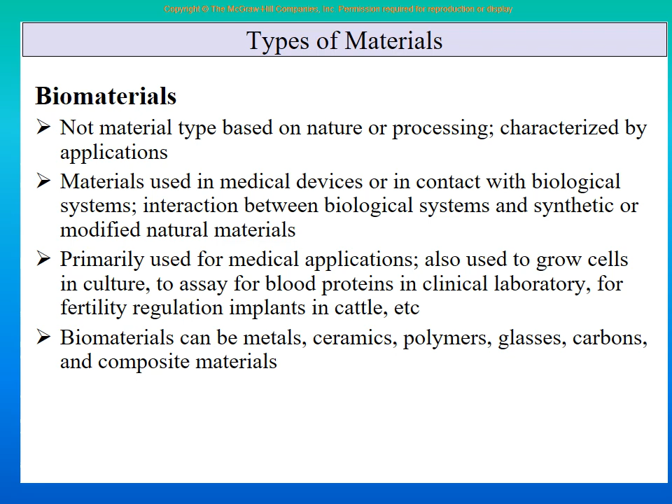So here we are just giving you certain examples. A finger joint - the finger was broken, you have to join it. A breast implant - there was breast cancer and so forth, and you have to implant something. A heart valve - one of the valves is not working and you replace it. A hip joint - the hip bone has been broken, which happens a lot with very old people, and you put an artificial joint there. An artificial heart - not just one valve, the full heart has gone so bad that you cannot really use it, so an artificial heart is needed.

Intraocular lenses - this is very common now, many people, rather than having glasses, have this operation and put these lenses inside their eyes. So all of these, and dental implants, very common, are all biomaterials. They are artificial materials engineered together by mechanical and electrical engineers and medical doctors, through their joint collaboration. You develop these things and test them for a long time.

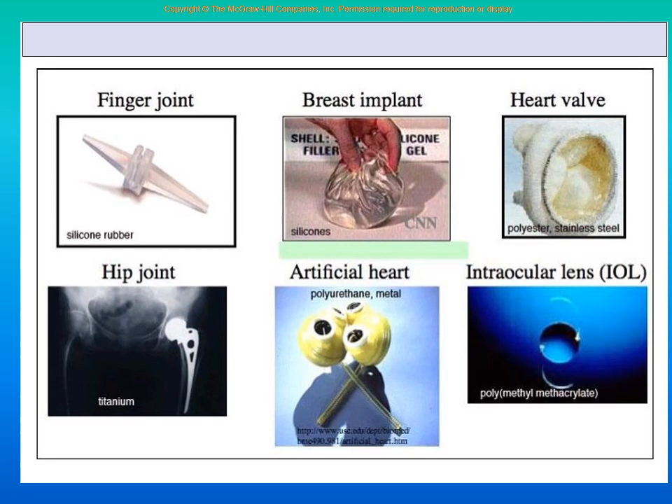There is something called an immune reaction - that if you put a biomaterial inside the body, this is not natural, so it may react and do bad things inside the body. So biomaterials design is not just about making them work perfectly, but designing them in such a way that there is no bad immune reaction when they go inside the human or animal body.

So there are still slides there, but your basic introduction to the world of material science is over. Basic introduction means what is material science, what is materials engineering, what is its importance, what are the interrelationships, how it is important in design and manufacturing - all those general things. Then the basic fundamental types and categories of materials: non-metals, metals, polymers and ceramics, and one other basic category which is a mixture of these, called composites. And then other categories based on applications or technology, such as biomaterials, nanomaterials, electronic materials and so on. So this whole world is now there, and these will be the chapters as we go.

Properties of materials will be a chapter. We can talk of polymers as a chapter, metals and alloys as a chapter - these will be chapters inside your book. To understand the science behind the properties, you will go to chapters like crystal structure, which is still about properties, but studied at a microscopic level. When we study properties at normal lab level, then you call it tensile properties, hardness, and so on.

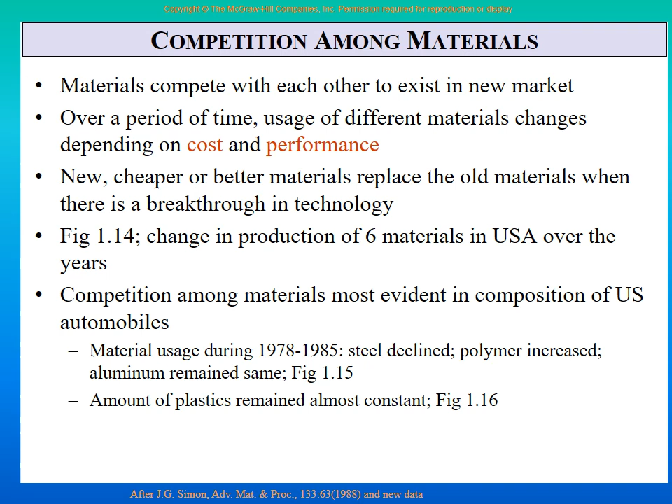Competition among materials. When you want to design a product, should you use steel, or should you use an aluminum alloy, or should you use a composite? This is competition among materials.

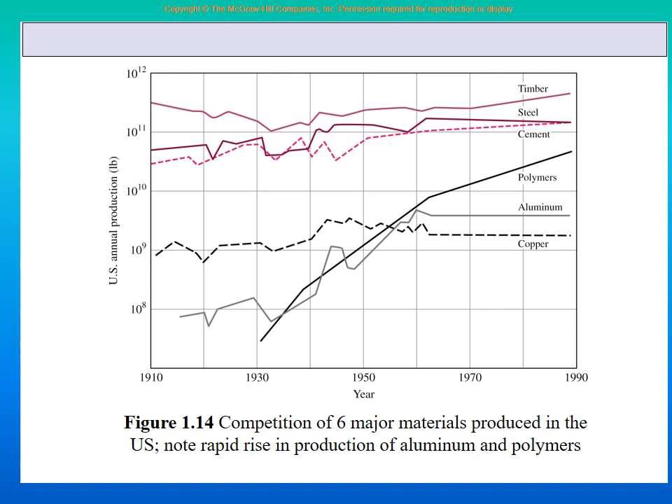Again, giving you a graph of copper, aluminum, polymer, and so on, and how they have grown over the years - competition among materials. Then in a normal car, there is aluminum, plastics, ferrous metals, and other types - competition among materials in a big product like a car.

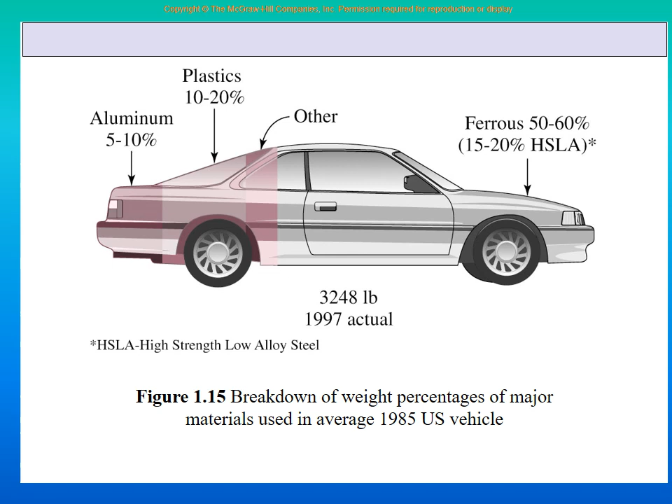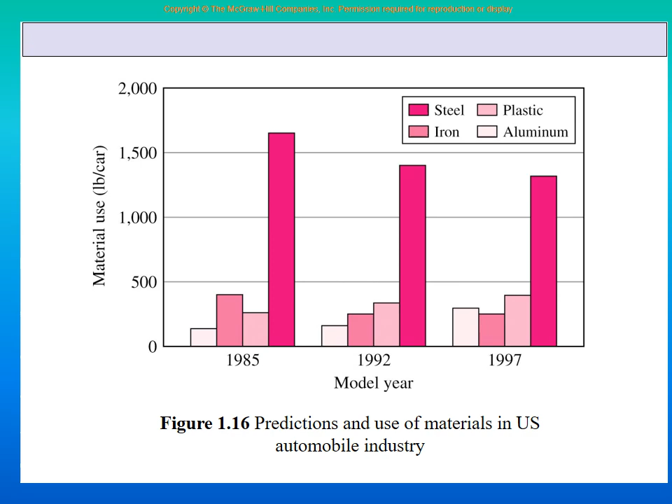Then you see, in terms of years, how much steel, plastic, iron, aluminum and so on are being used in the automobile car industry over time. So again, competition between materials.

Then recent advances and future trends - in the last 10-15 years, what has happened in the world of materials, and what is the future trend. So why have I left this as a reading assignment?

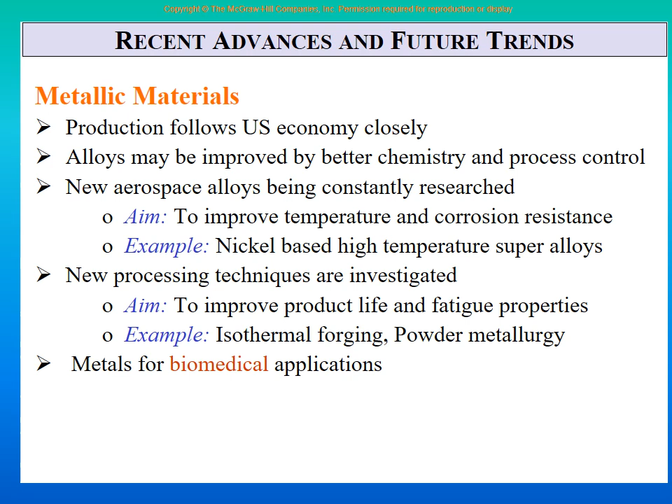Because the categories of materials are the same: What are the recent advances in metallic materials? What are the recent advances in polymeric materials? What are the recent advances in ceramic materials? What are the recent advances in composite materials? What are the future trends in electronic materials? What are the future trends in smart materials? This is new - shape memory alloys and piezoelectric materials.

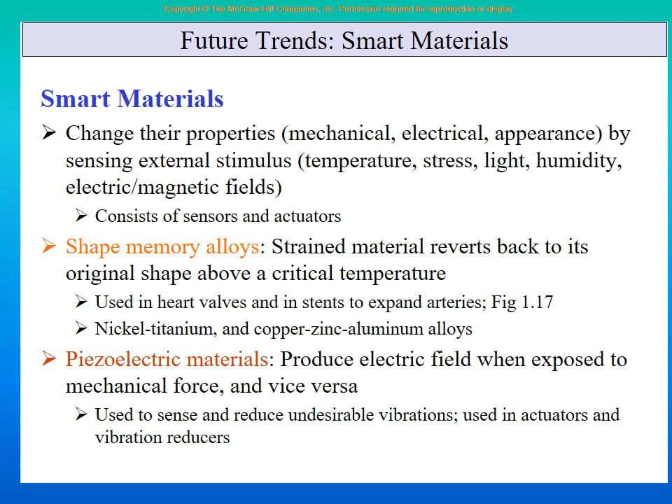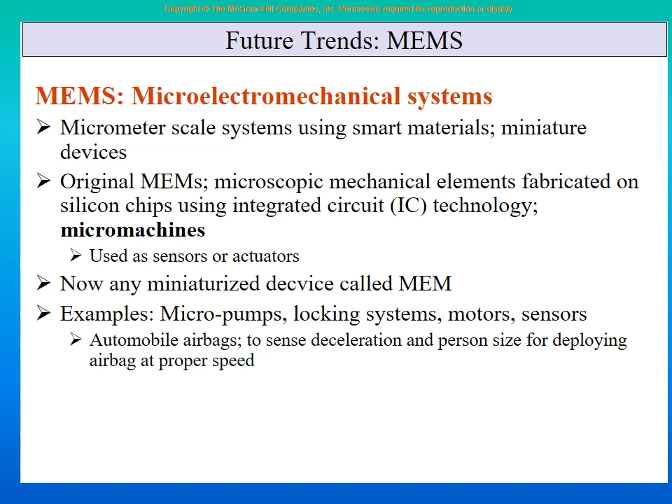Read about it - some applications of these smart materials. What are MEMS? Micro electromechanical systems - future micro electromechanical materials. What are the future trends in nano materials?

What is the relationship of design, manufacturing, and material selection? Again, whenever you design a product and change the material, everything changes. Whenever you manufacture a product and change the material, everything changes. If you make a material of metal, you go to the mechanical workshop to cut and drill it. If you make the same material of wood, you go to the carpentry shop. If you make the same material of plastic, you go to an injection molding machine. So that's the relationship between design and material selection.

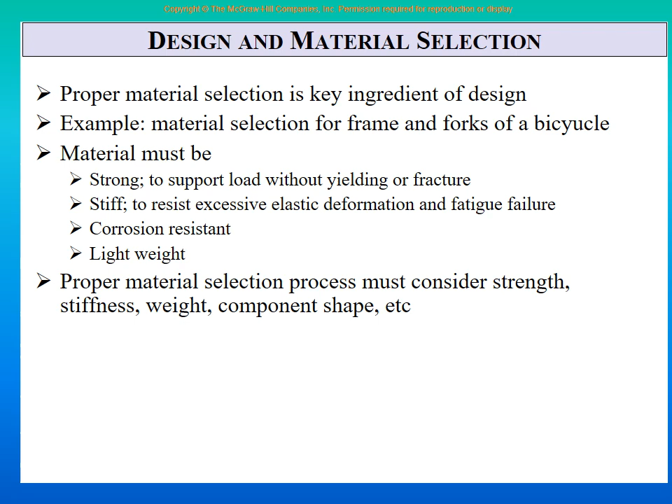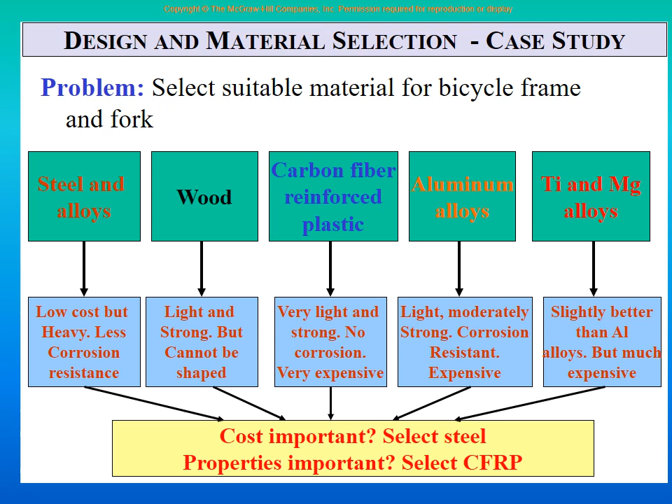And then an example of design and material selection - think about what will happen if we take steel, wood, or carbon fiber. Just read through these slides yourself and try to understand them.

So with this, welcome to the fascinating and exciting world of material science and engineering. Now you have a brief introduction of the whole course and the whole field, and that was the purpose of chapter 1. There are two things I want to achieve: you know the whole field rather than each chapter separately without knowing the whole field, so you get an idea. And secondly, you get excited about it and understand that this is very, very important. So this is the end of chapter 1.